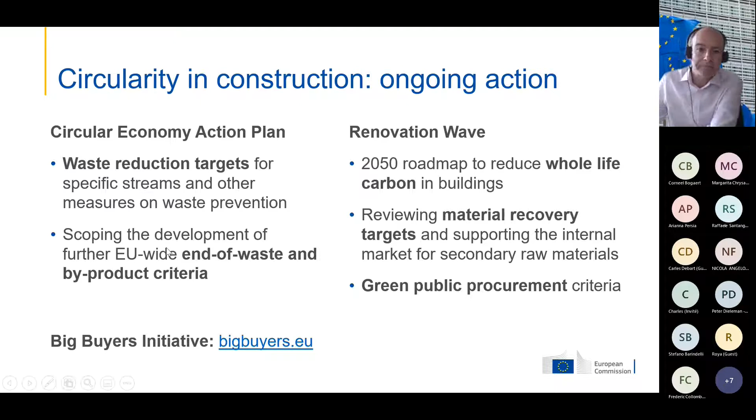The Big Buyers Initiative has a working group on circular construction and another one on zero emission construction sites, among other working groups as well.

So I mentioned the whole life cycle of greenhouse gas emissions, and this is a really emerging policy area now. Over the last couple of years this has become quite a high priority. What it basically means is that, particularly for buildings, when you look at the emissions, until recently we were mainly talking about the energy consumption of buildings. So decarbonizing buildings was thought of as decarbonizing the heating and cooling and the renewable energy that you need on a building. But actually when you look at the whole life cycle, the construction part and the demolition part, or the end of life, as we call it at the end of the lifetime, is also generating a lot of greenhouse gas emissions.

And we need to be tackling all of it, so construction is a major producer of greenhouse gas emissions. The way we've been tackling this is, first of all, we have the Level(s) framework, a framework developed a couple of years ago with 16 indicators to measure the sustainability performance of buildings. One of those indicators is global warming potential, which is the greenhouse gas emissions. This indicator is now making its way into various other policy files as a way of consistently measuring and reporting on the life cycle greenhouse gas emissions of buildings and construction.

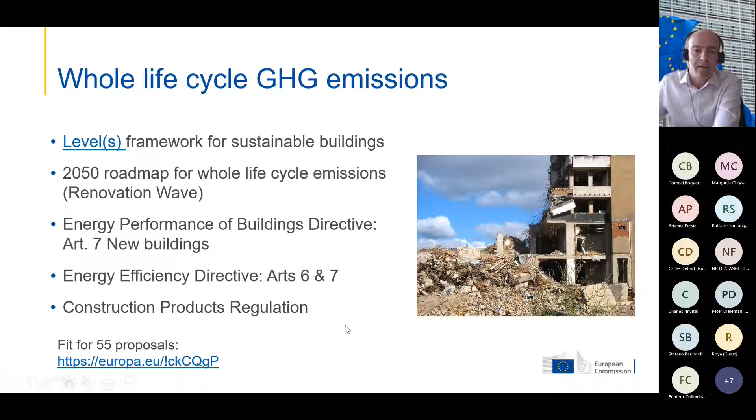The Construction Products Regulation is under review. It's a very complex piece of legislation that hasn't worked well, especially in two aspects. One was the single market for construction products, where putting a product on the market in one member state hasn't meant it's marketable across the whole single market. There have been problems with standardization and a backlog of standards. One aim of this revision is to empower the Commission to intervene in the standardization process and clear this backlog, and also to integrate sustainability requirements into construction products.

Not only greenhouse gas emissions, but other things like recycled content or other environmental aspects will be covered. It will empower the Commission to make product requirements—for example, for certain construction products, a minimum recycled content could be introduced.

For construction, there are also a lot of different funding programs. The biggest one in terms of money is probably the Recovery and Resilience Facility, under the Next Generation EU banner. This facility provides money to member states for rebuilding, investments and reforms coming out of COVID, to rebuild the economies. Most member states have an element there on building renovation, which is a major part.

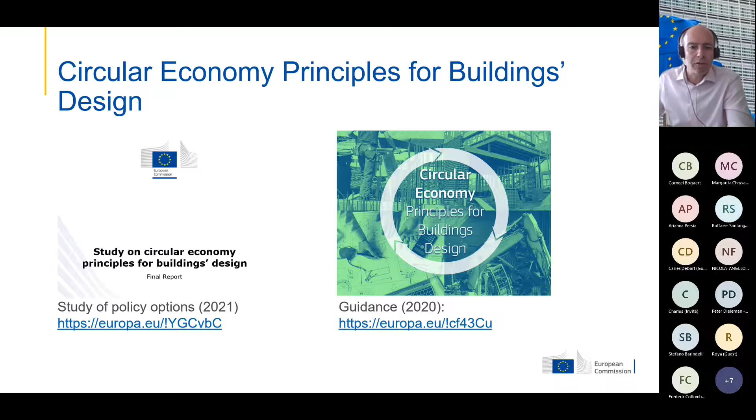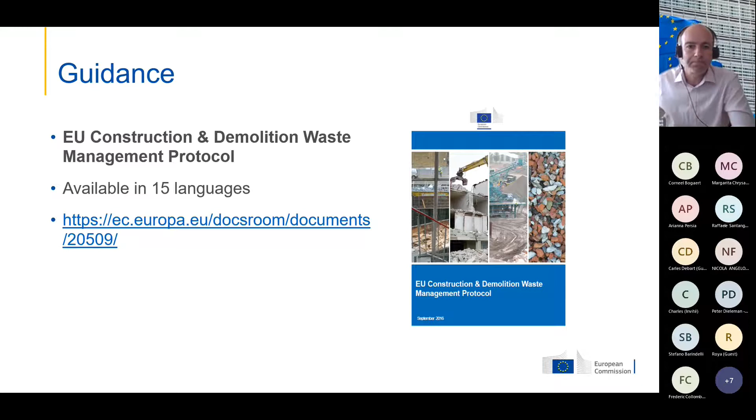That was my last slide. I can just highlight our website that's there with information on all of these things I mentioned. Also there's a LinkedIn group if you're interested, the EU construction ecosystem group, so that enables you to keep up to date with what we're doing as well. Thanks a lot, and I'll be happy to answer any questions.

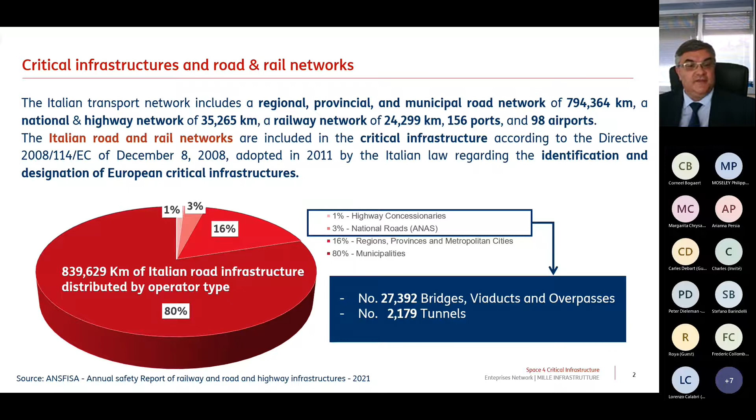The Italian infrastructure, road and railway works are estimated at just under 2 million units, of which only 3% are currently monitored. This number is so relevant due to the geological, morphological, and geographical characteristics of Italian territory, which is naturally predisposed to instability phenomena such as landslides and floods, and there's also high seismicity.

In 2018, on the 14th of August, a dramatic event shocked political bodies, road managers, and public opinion, not only at national level. The collapse of the Genoa Bridge, which caused the death of 43 people and the displacement of about 600 people, highlighted the need to intervene on the method, effectiveness, and responsibilities of the infrastructure monitoring system.

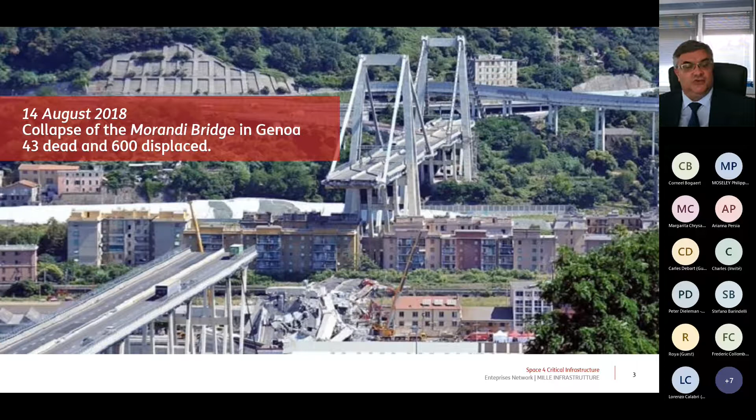In the last 5 years, the Italian Ministry of Infrastructure has focused its attention on the drafting and publication of technical regulation aimed at improving the methodologies of static and dynamic monitoring of infrastructure. In 2021, the guidelines for classification and management of risk, safety assessment and monitoring of existing bridges of highway, national, provincial and metropolitan roads were updated. The main objectives are the uniformity of risk assessment criteria, the adoption of a single line of attention for all risk, and field testing of guidelines to verify the actual increase in safety level.

Similarly, this year the publication of guidelines for the monitoring of tunnels is expected. Finally, the Ministry has introduced laws and technical standards that require design companies to carry out technical economical feasibility projects for public works using building information modeling solutions. The main purpose is to create an open digital database for works with high alert level, to gradually achieve the full digitalization of the infrastructure network.

The definition of an effective monitoring system is important to solve problems such as the long time scales for risk classification, the management of design and construction defects, the lack of funding and very long approval and construction times, and the increasing insurance costs.

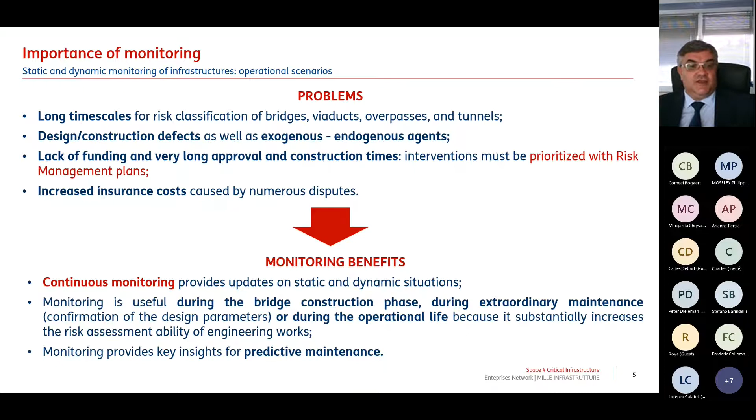At this time, the network is composed of 78 companies, consortia and districts, from spin-off startups, small and medium enterprises, to large companies with highly innovative products, aggregated with universities and research institutes of national and international renown. Mille Infrastrutture represents the largest Italian national network of enterprises, an excellent technological interlocutor to address and solve every complex problem of control and monitoring of the national road and rail network.

The network provides its top-level structural engineers the collaboration of the best experts in innovative technologies, from satellite to multi-sensor drones, from varied types of sensors to artificial intelligence applications, with the final aim of implementing a secure IT platform to ensure the protection of national critical infrastructure.

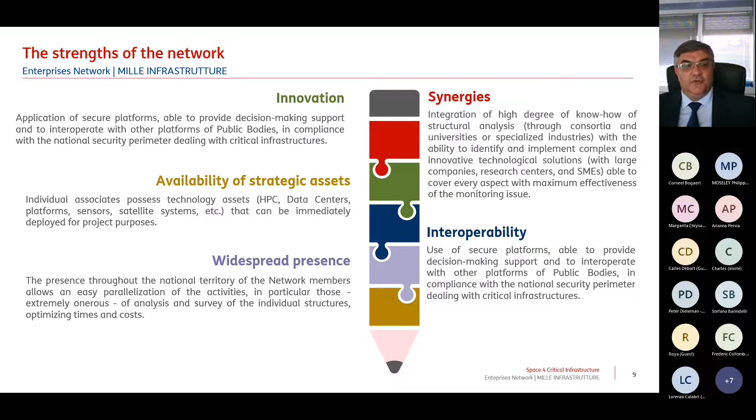In full compliance with regulation, the network with its associates can design technological solutions capable of responding to the complexity of the requirements. The main objectives are the analysis and classification of engineering works that need to be monitored.

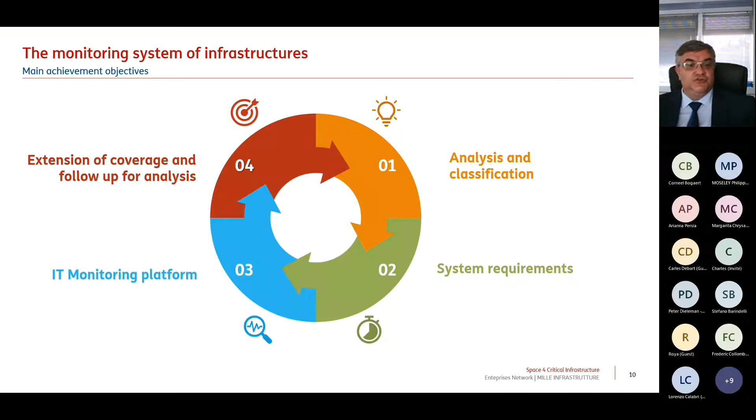This includes identifying the type and number of sensors, the definition of system requirements of the monitoring system, the design and development of the IT monitoring platform, including data population, analysis and monitoring in compliance with guidelines, and the dynamic extension of coverage and follow-up analysis to ensure continuous system refinement.

The enterprise network is implementing an innovative IT platform for monitoring infrastructure that are not considered as isolated elements but are evaluated as an integrated system with the territory in which they are located.

Traditional and innovative sensing technologies are integrated to ensure reliable and accurate measurement of the behavior of the infrastructure and territory system. The integration within the monitoring platform of the most innovative technologies for data analysis, processing, verification, and validation makes the system effective and fast in managing large amounts of data.

A central role of the system is represented by the stakeholders, who express the demand and at the same time validate the effectiveness of the decision support system.

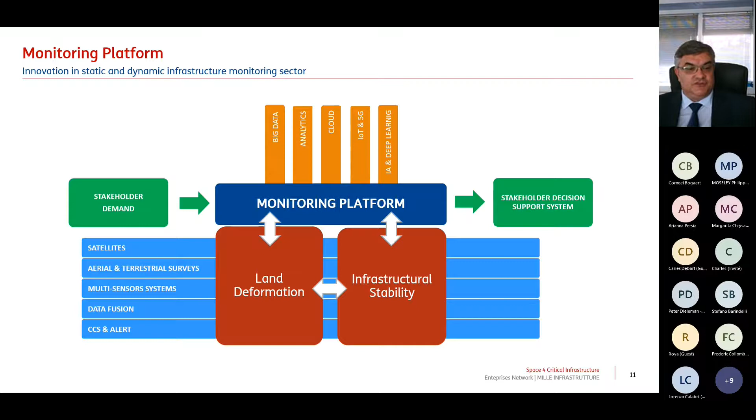Mille Infrastrutture has 400 experts who provide their contribution in 5 technical tables. The first table is dedicated to study and analysis by structural engineers and technicians who know the technical regulations to be applied for the monitoring.

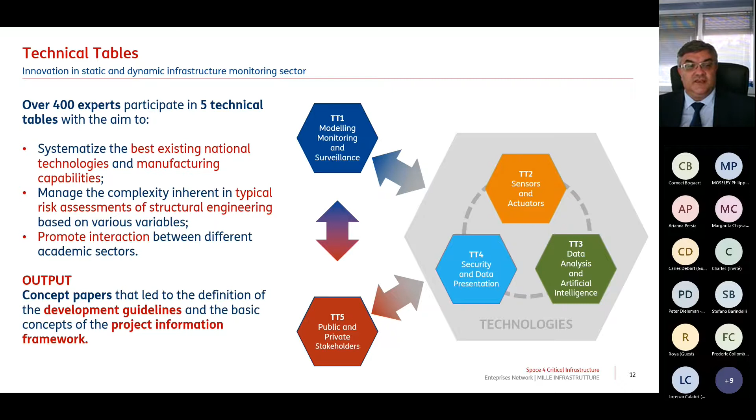The whole of the second, third, and fourth technical tables represents the innovative component proposed by the enterprise network, respectively in the fields of sensors, data processing and analysis, and IT platform. The fifth technical table is the place of confrontation between structural technicians, experts in innovative technologies, and stakeholders.

In this section of the presentation, I will highlight how Mille Infrastrutture considers the application of advanced differential interferometric SAR techniques in order to monitor the territory and road infrastructure to be very relevant.

Since 2000, some companies of the network have successfully analyzed various case studies with this satellite technique. The output of some projects developed by Geocart company are shown in these images.

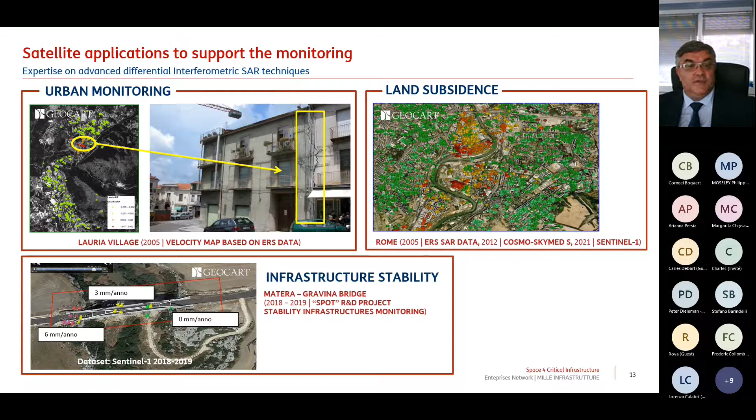The slow movement of urban sites, areas affected by subsidence phenomena, and bridges and other engineering works have been analyzed. The use of these satellite technologies makes it possible to quickly identify the areas where potential risk phenomena for infrastructure stability are taking place, helping to define a priority for intervention based also on the analysis of velocity maps.

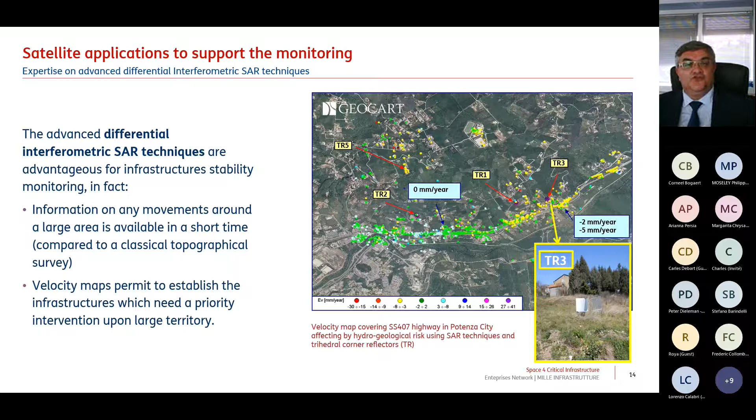Mille Infrastrutture has been involved by the Province of Imperia in the case study of monitoring and design of structural maintenance intervention on the Monesi Bridge in the Liguria region, where advanced differential interferometric SAR technique has also been applied.

The technique, developed by e-GEOS company, a member of Mille Infrastrutture, was applied using ascending and descending Cosmo-SkyMed SAR datasets in the period between January 2018 and December 2021.

The main result is the persistent scatterer mean velocity map. It reports the measured mean velocity along the satellite line of sight upon particular sites.

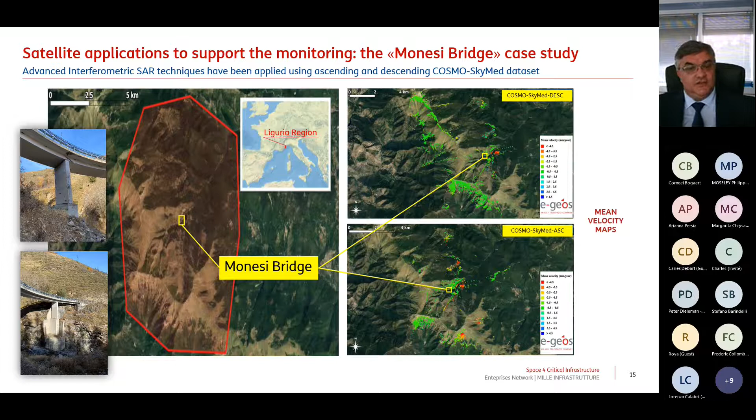The figures on the right side show the two velocity maps carried out using ascending and descending Cosmo-SkyMed datasets. The combination of the mean velocity maps based on the two geometries permits measurement of the east-west and vertical components of the mean velocity of the persistent scatterer pairs.

The yellow square identifies the location of the Monesi Bridge, on which the presence of red dots shows that average velocity of movement with a certain magnitude has been recorded, especially in the east-west direction. These results have been integrated with those from other monitoring techniques, and the working group is currently planning intervention to mitigate the risk of bridge instability.

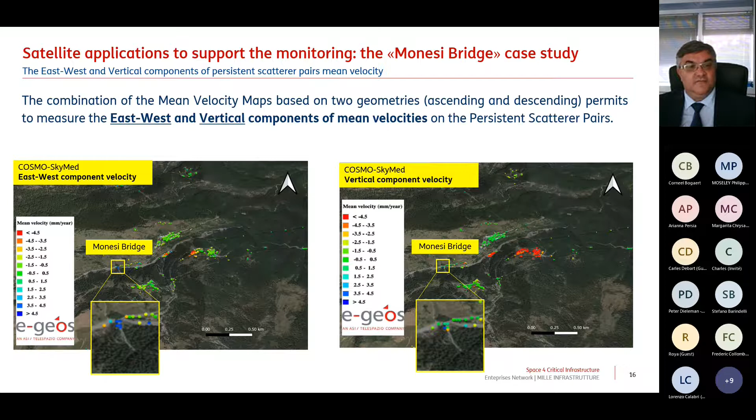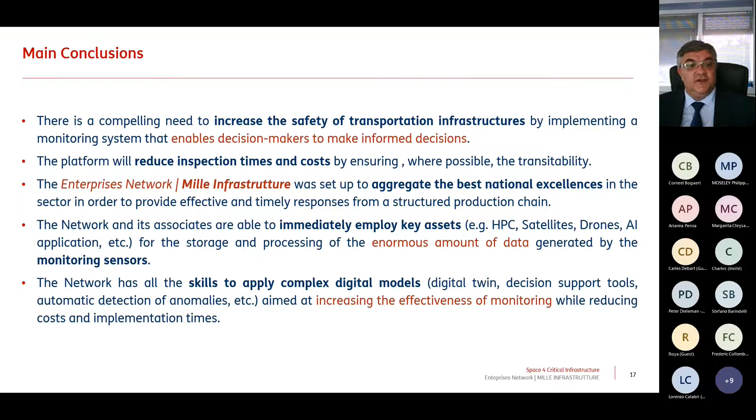The Enterprises Network Mille Infrastrutture was set up to aggregate best national excellence to increase the safety of transportation infrastructure by implementing a monitoring system that enables decision makers to make informed decisions. The network can immediately deploy key assets of its members to increase the effectiveness of monitoring by reducing costs and implementation time. In the near future, sharing the circular approach, Mille Infrastrutture will be able to implement research and development models in the field of material processing and monitoring of their state of health, to bring down barriers in the use of recycled materials also in the construction sector.

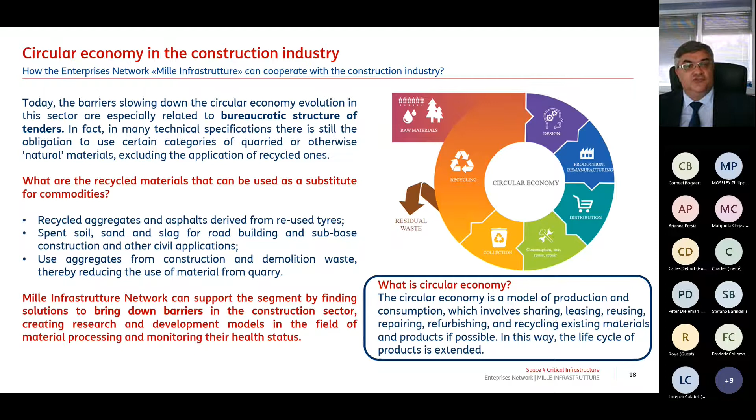Thanks a lot for your attention.

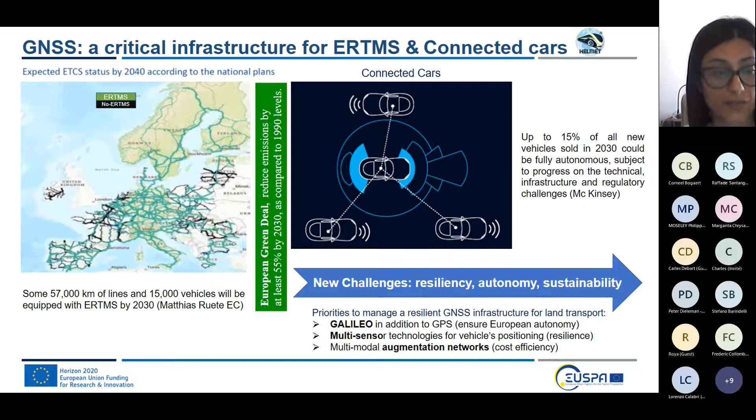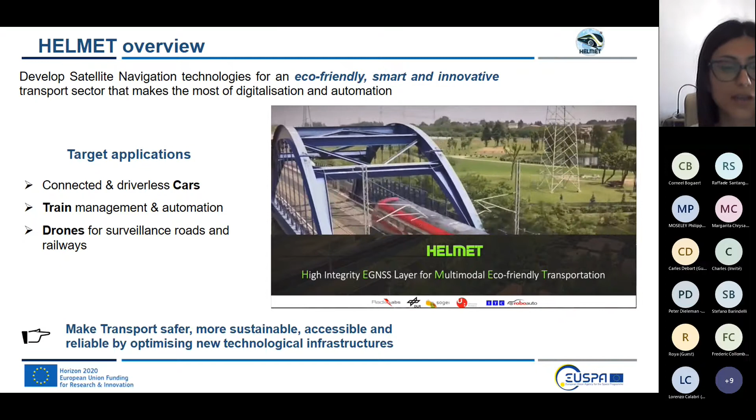This slide shows an overview of the HELMET project, which aims to develop satellite navigation technologies for an eco-friendly, smart and innovative transport sector that makes the most of digitization and automation. The target applications are mainly two, as you can see from the video: connected and driverless cars, and train management and automation, but also unmanned aerial vehicles for surveillance of roads and railways. This is in order to make transportation systems more safe, sustainable, accessible, and reliable by optimizing new technological infrastructure.

The main goals of the HELMET project are the development of multimodal, multi-sensor integrity monitoring architecture based on GNSS-based solution, introducing high integrity location determination system both for car and trains, but also with unmanned aerial vehicles for monitoring.

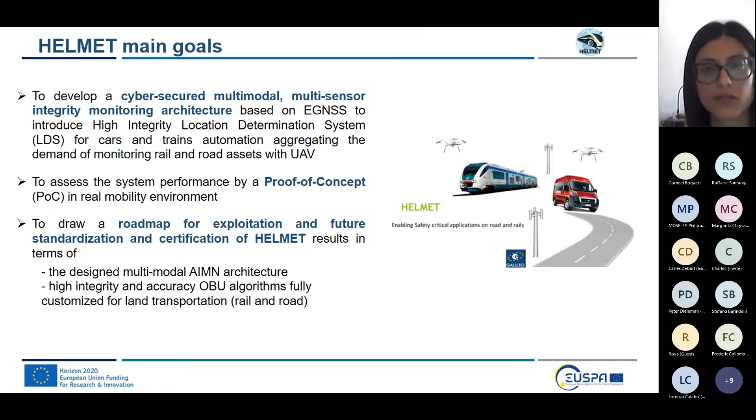The assessment of the system performance by a proof of concept in a real mobility environment, in this case in Rome, as said before. At last, but very important point, the drawing up of a roadmap for exploitation, standardization and certification of HELMET results, with reference to multimodal augmentation and integrity monitoring network and high integrity and accuracy onboard unit algorithms for rail and roads.

Referring to the three main pillars mentioned above, HELMET exploits the enterprise experience and cutting-edge technologies available in the state of art to design the multimodal augmentation network for land transportation and UAV at high integrity and high accuracy. It provides for the usage of cost-effective devices for high accuracy and integrity algorithms, and aims at the commercialization of GNSS-based solutions for land transportation and certification in road and rail contexts.

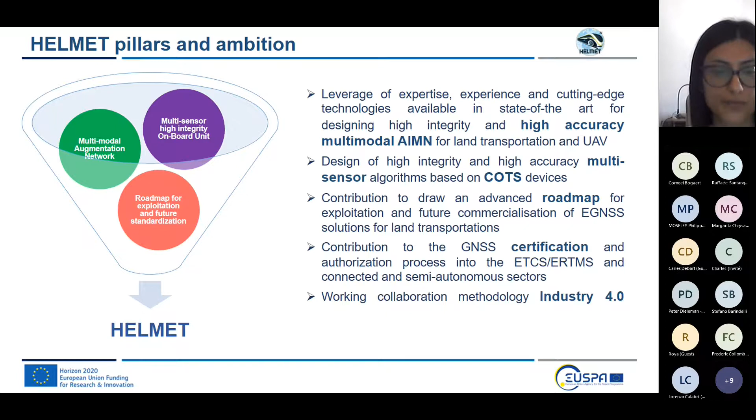HELMET is a multidisciplinary team, including research centers and industrial partners. Among the research centers, we have Radiolabs, University of Pardubice, and DLR. On the other hand, we have the industrial partners, ITC, Sogei, and RoboAuto.

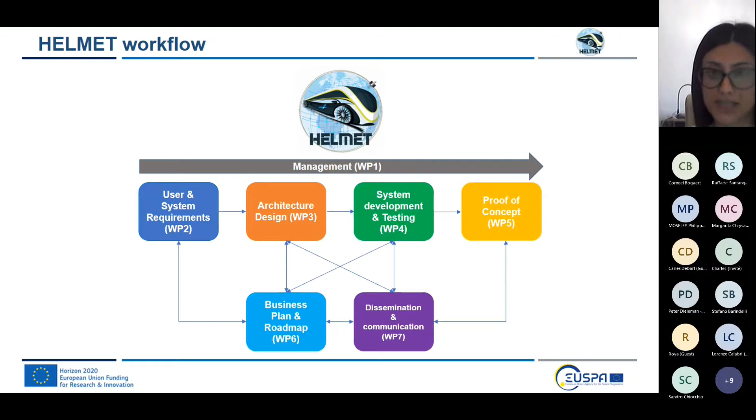In this slide, we can briefly see what are the main work packages of the project, starting from the definition of the requirements of the HELMET platform, passing through the design and development activity, up to the demonstration and dissemination of results.

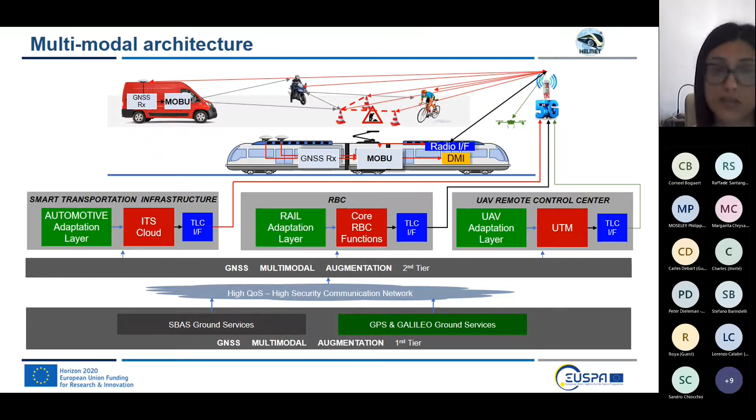Specifically, the HELMET multimodal architecture is designed to operate in three different application segments: railway, automated car, and unmanned aerial vehicle segment. It includes an augmentation subsystem, a communication subsystem, and a multi-sensor onboard subsystem. The augmentation subsystem is the same for the three segments, with different service levels based on the network infrastructure, while the communication and onboard subsystems are tailored to each application.

Going into the details of the architecture, the augmentation subsystem provides the augmentation GNSS integrity messages, while the multimodal multi-sensor onboard subsystem provides the required system information such as position, velocity, and time, but also the attitude of the vehicle. It includes a set of sensors like the GNSS receiver, IMU, cameras, and LiDAR.

There is also a communication subsystem for the interaction between the augmentation network and the onboard unit, and finally the processing unit that is responsible for integrating measurements from the GNSS receiver with other sensor data, but also PVT and protection level estimation.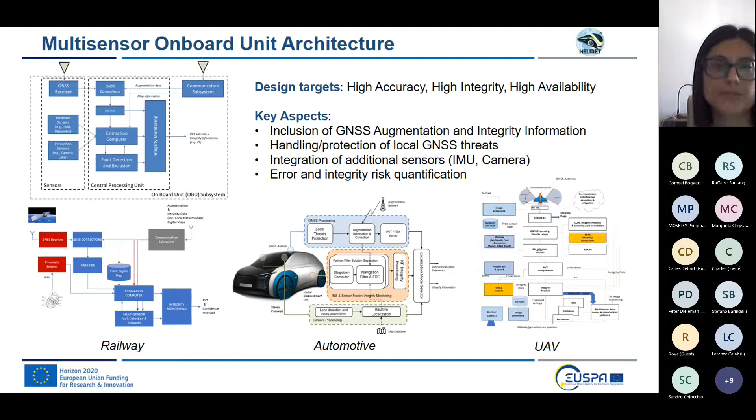Moving on to the test phase in a real mobility environment of the helmet solution, the joint demo was carried out with RoboAuto and DLR for the automotive part, and Radiolabs for the rail part. In the last month, on the Roma Fiumicino highway, with start and end tests at the University of Roma 3 in Rome, where one of the associated laboratories of the Radiolabs consortium is located.

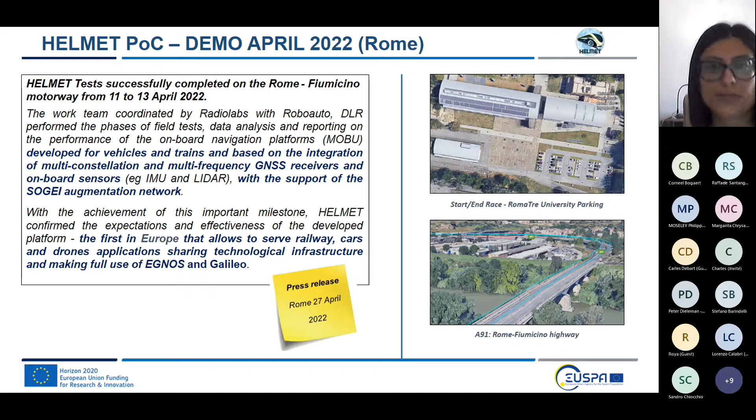Regarding the demo approach for the rail part, since we didn't yet have a real train available for the HELMET project, as Radiolabs we simulated the behavior of the train with a vehicle bound to move along a predefined route. Specifically, we generated a track database with data recorded on the Roma Fiumicino way, and then refined the calculation of PVT using commercial RTK services.

Once the track database and ground truth were created, we ran further test campaigns on the same road, passing on the same line, to carry out additional acquisition and data processing for real time, but also for post-processing analysis.

As you can see from the figures, for the field test we set up the Radiolabs vehicle with a GNSS antenna and receiver, the onboard unit PC running the Virgilio simulator, which is the Radiolabs onboard unit software, GoPro cameras and a 360 camera in order to acquire environmental context data for deep analysis in the post-processing phase. The next step will be using a train running on a real railway for testing the high accuracy and integrity onboard unit.

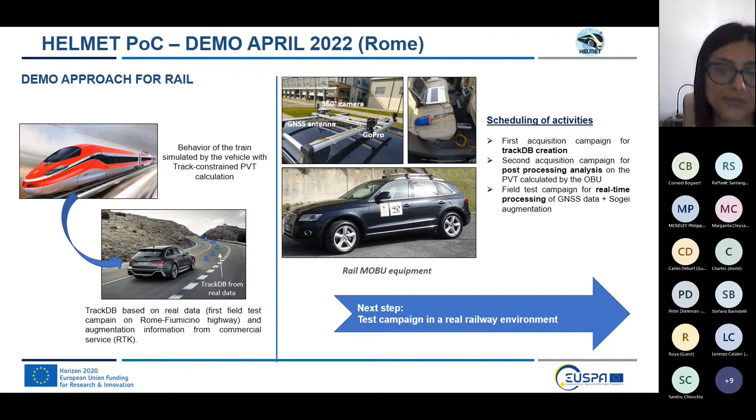In this slide, you can see the equipment of the Roboauto vehicles that was in charge of the development and testing of the onboard unit for the automotive part, while at the right, an image of the start of the joint acquisition campaign in Rome.

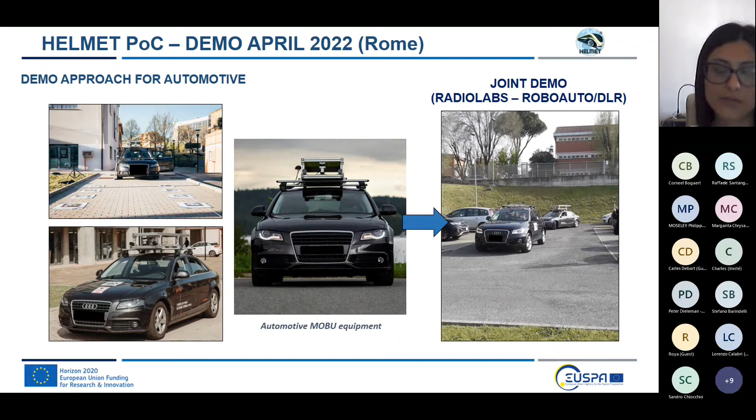For concluding, the key aspects investigated within the HELMET project concern the design and development of a multimodal augmentation platform for rail, roads and drones, a safety framework for roads, vehicle harmonized with avionic and rail best practice, the multi-sensor onboard unit with advanced integrity monitoring capabilities, including statistical knowledge about local hazards, and finally the contribution to the standardization activity carried out by RTCM Special Committee.

Regarding the future development of the project, already from the results currently arising from this project, interest is growing in the future possible collaboration to move to the operational phase of the HELMET solution, or to extend its functionalities with other research projects.

Potential customers or stakeholders in Italy, like for example ANAS and RFI, have been identified that can represent the end user of the HELMET platform, or collaborate with the HELMET consortium to carry out further development of the architecture toward the operational phase.